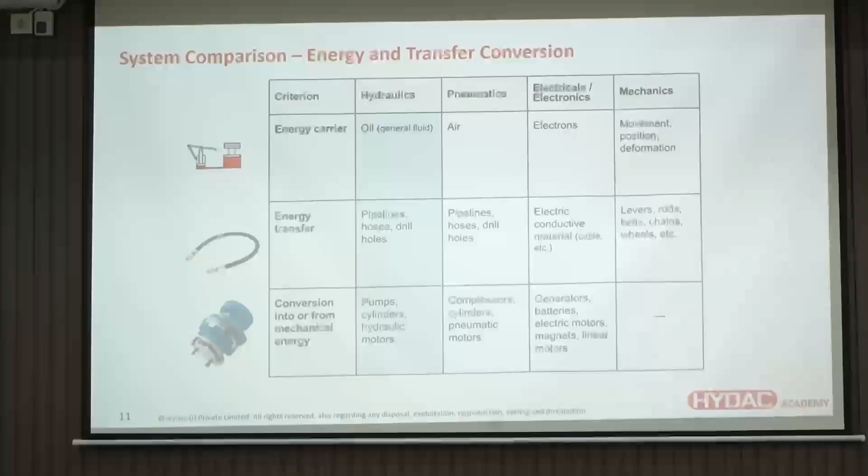So we had just made a comparison of different technologies. Typically, wherever very high forces are required, the best suited one is hydraulics. But alternatively, you can match that with electricals. For the size ratio, hydraulics to generate the same force, the component might be only this much size. But if I have to generate the same force using electrical, the component will be much bigger. When it comes to safety aspects, nothing is safer than pneumatics. So there are multiple options for you guys to select which technology we have to use. Looking at various aspects, you need to pinpoint one technology which can be used.

Now, I also told you that India is a developing country. There are several industries in India which have been classified also. Large scale companies are there, similarly medium scale enterprises, small scale enterprises, and such kind of things. Now, you go to any industry, you'll see one or the other automation being implemented either on the machine level or on the entire factory level. It depends on the size of the industry.

So now, if I generally see which are the predominant industries which are working, I can classify them as steel sector, cement, automotive, railways, mining, machine tools, press, defense, oil and gas, power, and mining as well. So you take any industry for that matter.

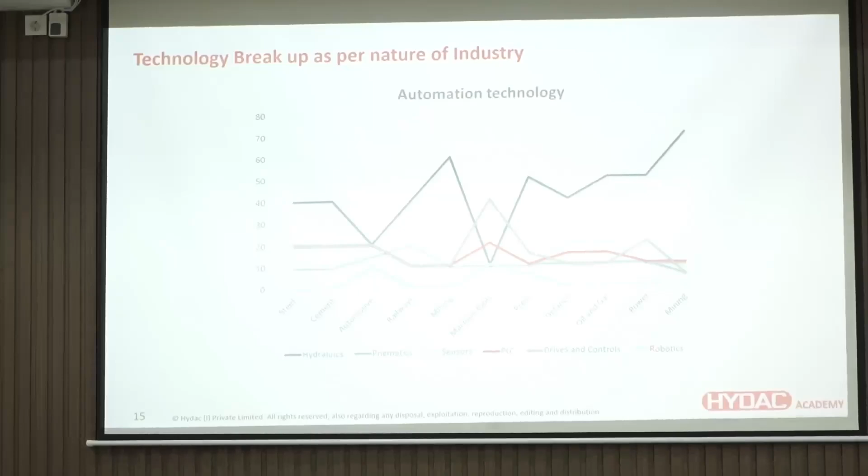So in this particular graph, you can see hydraulics is predominantly used in steel and cement. Automotive is a bit lesser because we don't need that much amount of power. Mining, predominantly it is hydraulics. Machine tools, when I say machine tools, it is CNC machines - basically your lathe or milling machine or vertical milling machine, such kind of things. It requires hydraulics only for certain operations. The rest is all electrical.

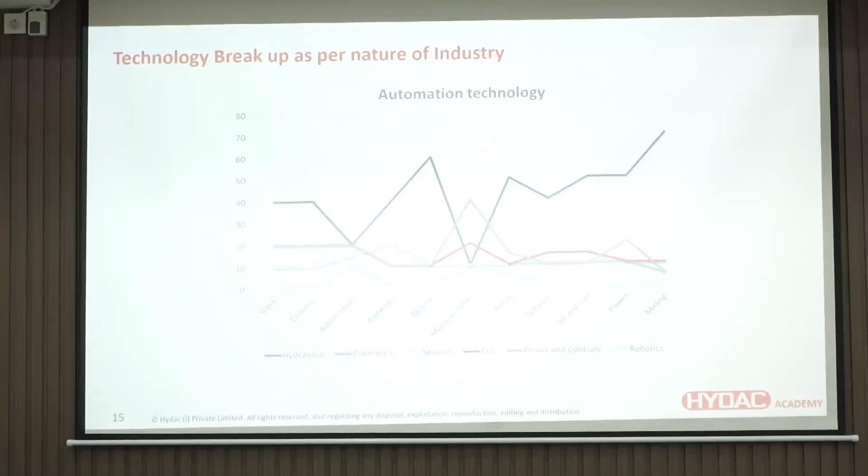So every industry has got its own share of hydraulics, pneumatics, PLC, and sensors. These technologies form the basics for your automation. So when you, many of the students here, end up into a job, you may not happen to use all the technologies, but you may end up using any one of the technology.

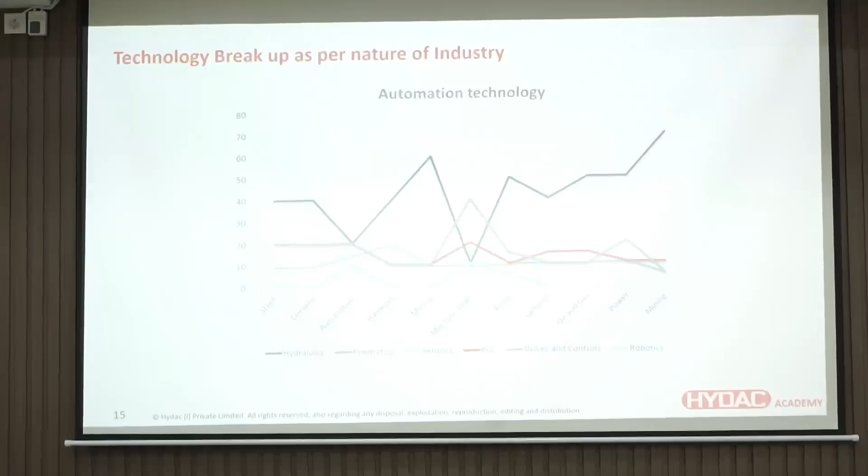Some people may get into something called PLC programmer, where you'll be constantly writing logics for the machine. Few of you may get into design aspects of hydraulics and pneumatics, so there's a lot of calculation of force, pressure, such kind of things, and selecting the components also. But irrespective of any industry, you have got potential for all the technologies.

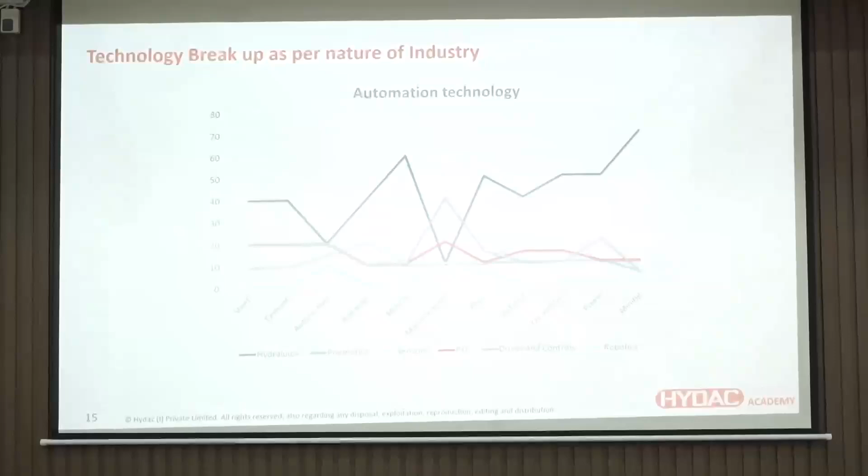Now, this is a statistics predominantly done for India only. We are a nation where we are very aspiring. We want to implement the technology, we want to know the technology, but if I generally visit a lot of industries, many of our industries are still stuck in Industry 3.0. And when it comes to small scale and medium scale, we are still with 2.0 also. But now, as a technology and learning aspect, we have already reached 5.0.

So what is the next generation going to be? I am sure my old friend, in the first session of the FDP, Mr. Milind Tavre, he addressed Industry 4.0 and 5.0. So what does today's generation PLC work like?

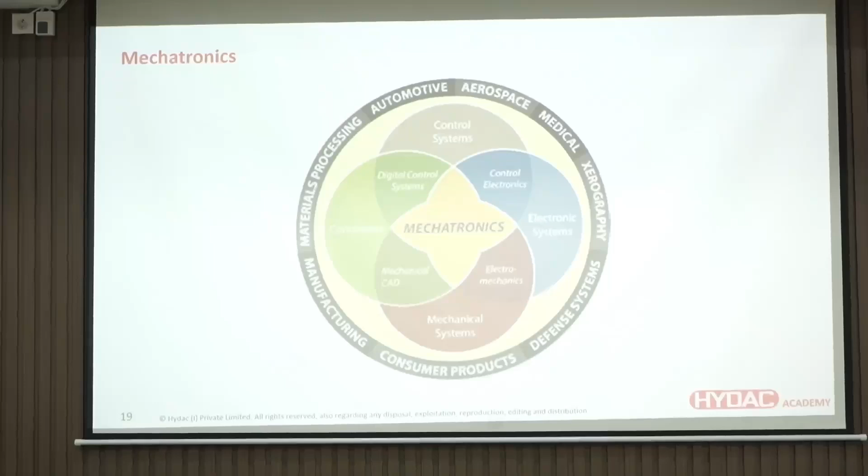Now, since my introduction was given to all of you, I have ended up working in the industry for almost 24 years now. Since 24 years I have been working in industry, but Ramesh sir read a big list of companies. So I had got a very good habit, or a bad habit, of changing jobs. In the initial days of my career, whoever used to offer me good salary, I used to jump. So I started changing companies. I started with a CNC company, went into automation, then went into security control access products, then went into wafer fabrication - not the ice cream cone wafer, semiconductor wafer fabrication - then went into hydraulics pneumatics, continued with hydraulics. Now I have switched over to 3D printing.

Can you tell what is my background? Whether I'm computer science, mechanical, electrical.

So what I meant to say is, though the technologies are different and your areas are different, when you end up in an industry, it really doesn't matter which stream you belong to, unless and until you can fulfill the given task. So my background is basically electrical electronics. But to be very frank, I am very comfortable with hydraulics and pneumatics. Problem was I couldn't see electrons. Hydraulics, at least I can see the oil coming out, air pressure I can feel. Concepts are all the same. It is only how you apply your mind and understand that particular process.

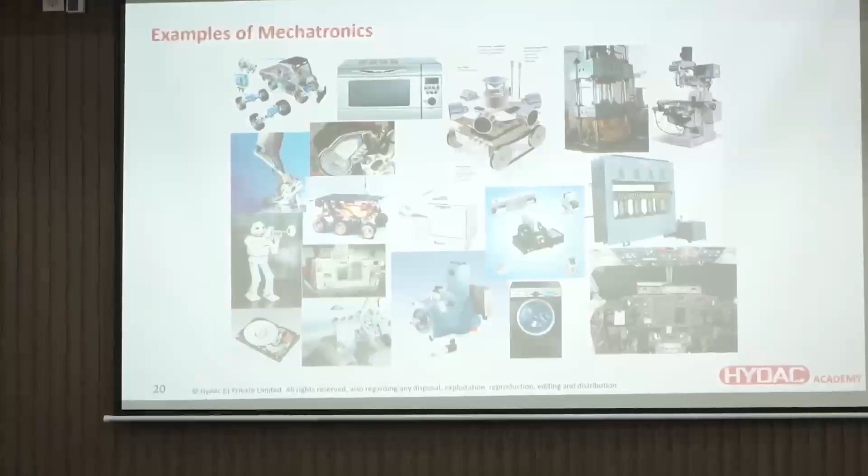So there can be a lot of different kinds of mechatronic systems also, and robotics also you can name as one of a mechatronic system. It's not that it is a very unique technology or anything. It is nothing but a combination of your electrical, mechanical and IT. Output product is called as robotics.

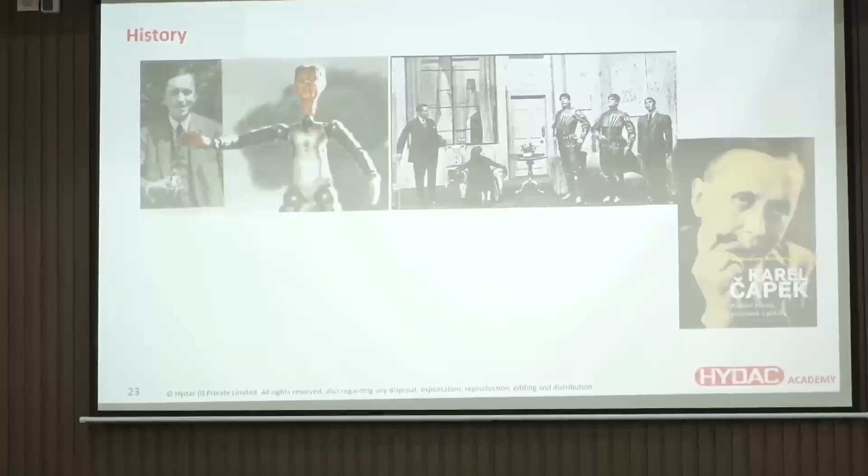So these are all we have covered during the starting. Here also I don't want to bore you with the history and all. Basically robotics was not at all meant for a technical term. It was basically a Czech Republic drama which happened in 1921 where they first introduced the term called robotics, which referred to slaves. Over a period of time when we started doing advancements in mechatronic systems and all, we adapted this word called robotics.

So I think these are all known to you. I don't want to bore you with such kind of things. You can Google and get it, and even I can share this presentation and you can have it later.

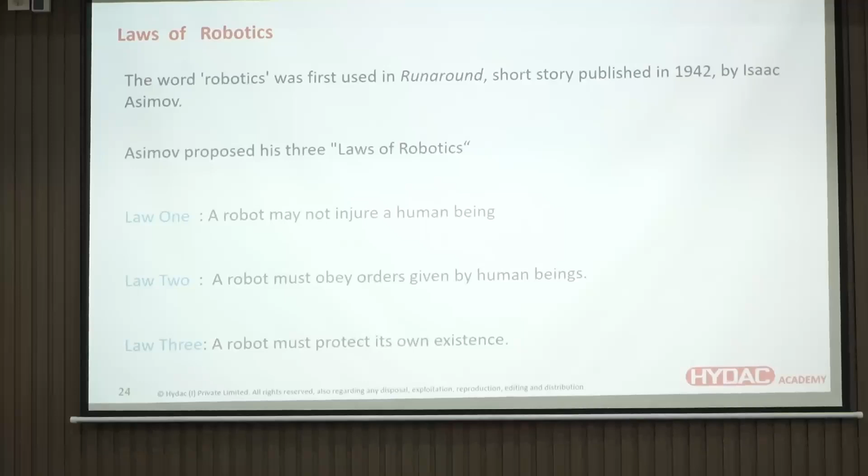So the main typical robots which are used can be classified into two aspects. One is industrial robot, or you can refer it as stationary robots. Whereas the other one we can call mobile robots, which is not in a given stationed position. It will be continuously on the road.

Mobile robots all started with students participating in competitions like rover competitions or racing car competitions. Nowadays, people even design rovers for sending to space. Have you participated in the ISRO research basket? Every 2 or 3 years, ISRO gives a lot of problem statements, called the ISRO research basket. HAL and other government agencies do it too. It's open only for institutions. You can go through different problem statements, and if you think you can provide a solution, write a proposal and send it. They will fund it for 3 to 4 years, spending crores together, and you can pursue that.

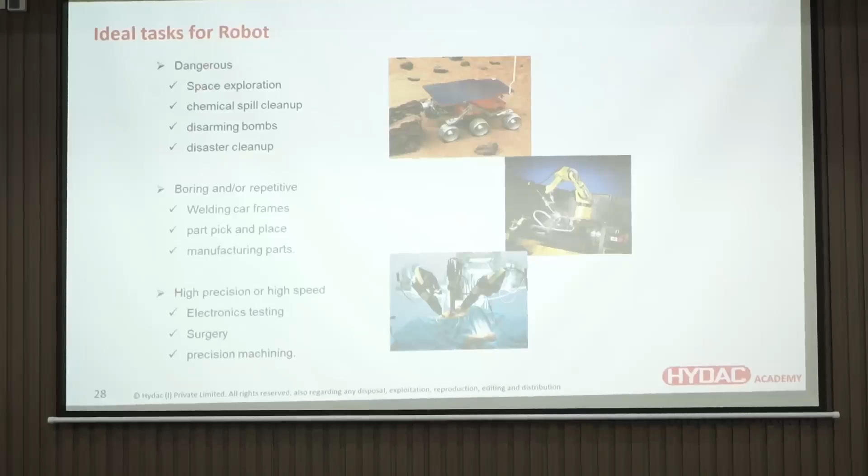Ideal tasks for robots - robots don't need to be applied everywhere. Typically, only for repetitive jobs where you'd otherwise kill human creativity. For example, if I have to pick and place something and tighten it, but I've quarreled with my wife at home, that anger will show in my work - I won't tighten it properly. Machines are safer that way; they do repetitive tasks well. Second, wherever humans cannot reach - very small areas or hazardous areas with poisonous chemicals - we can use robots.

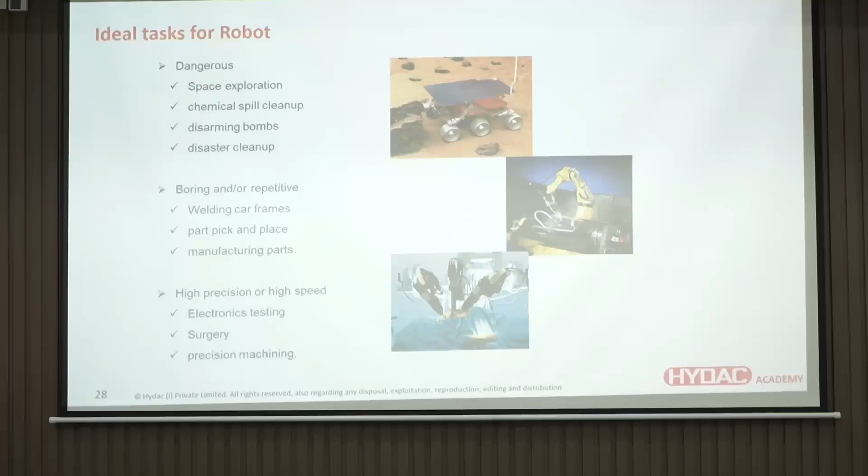This is a trending topic now - robotic surgery, done with robotic precision. There too, predominantly this technology is being used.

As I said, robotics is not of one discipline. Many disciplines get into robotics - mechanical, electrical, electronic, instrumentation, systems engineering, and even computer science. Today's generation, even AI, ML, and data analytics all have a role to play in the advancements of robotics.

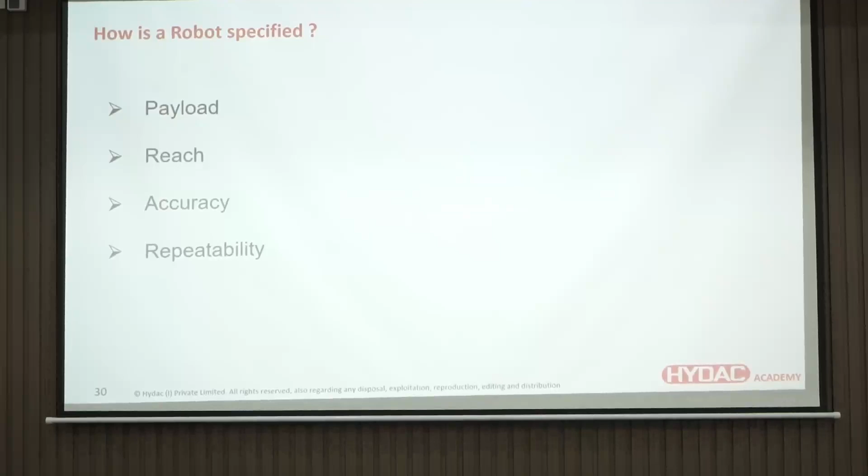How do you specify a robot is very important, since there are many different models of robots. When you want a robot, how do you ask for it? Generally, the first thing is payload - does anybody know what payload is? It's how much weight it can lift. For example, if this hand is a robot, this becomes axis 1, 2, 3, and if I have to lift this, the weight I should be able to lift is called the payload. Second is reach - how far your robot has to reach. Then what is the accuracy?

Here the cost really changes. You can do it with an induction motor with very coarse accuracy, or if you want very high accuracy, as low as 1 micron, you can get that too, but then you need to use servo motors. Then there's repeatability - if I do the same task every time, what will be the repeatability, or what will be the deviation in the end position? These points are very important when specifying a robot.

I've explained the same thing. This presentation will be available to you, and you can read through it.

This was a slide I prepared 7-8 years back. Is this all still true today?

Have you heard of collaborative robots? What is the difference between a normal robot and a collaborative robot? Correct - a collaborative robot can work in coexistence with other robots or even human beings, and that will not lead to accidents. That is called a collaborative robot.

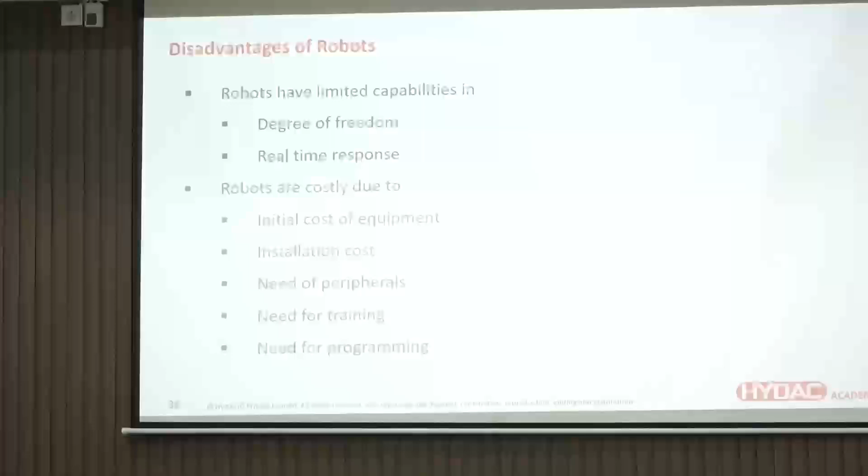So disadvantages of robots, some more here. Initial costs are very high compared to a conventional automation system. Whenever you need to expand, you need a lot of other peripherals. So like tomorrow you want to incorporate a vision sensor, it has to be had separately and then integrated.

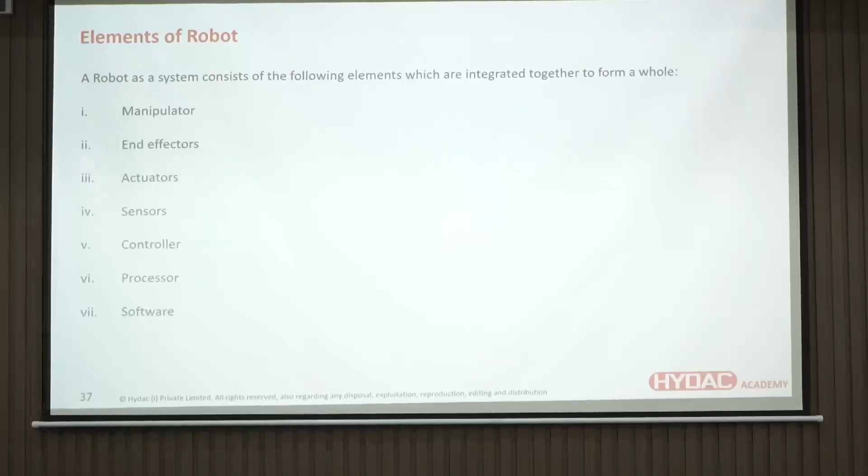So, different elements of a robot. A robot is not only one thing. You've got an end effector, you've got an axis, you've got a manipulator, and many such kinds of things. Mainly the manipulator is your structure, which creates the joints for achieving the degree of freedom. The end effector is basically the gripping mechanism or the tooling mechanism or insertion mechanism, whatever you want, you can have. The robot can be a simple thing.

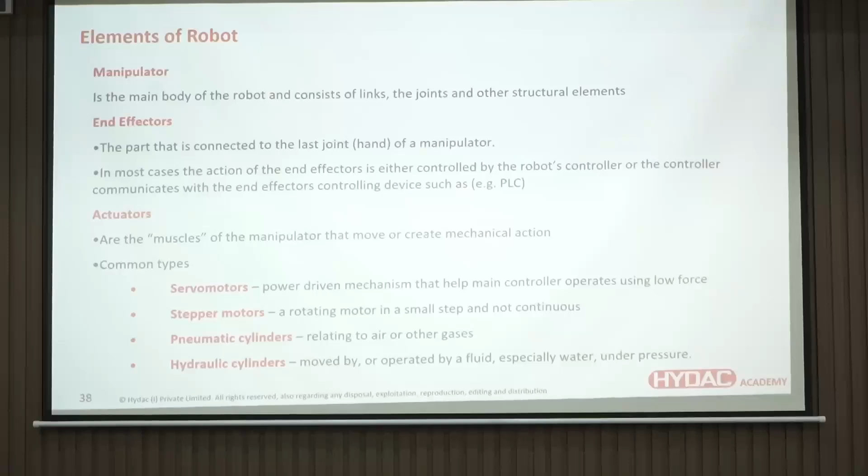At the end of the robot, you can put a welding torch. You can put a two-jaw gripper to lift any component. Or if you want to pick round objects, a three-jaw gripper. So end effectors - the possibilities are endless.

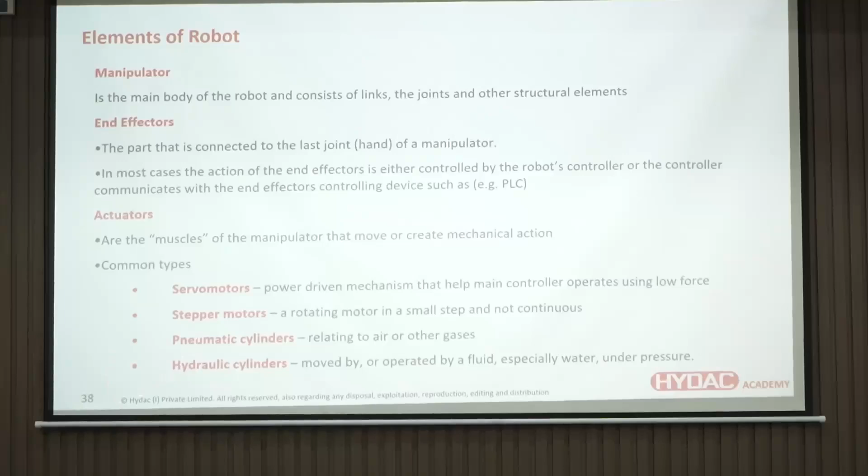Actuators - so depending on your accuracy, you can have either hydraulic cylinders, pneumatic cylinders, stepper motors, and for very high accuracies, servo motors.

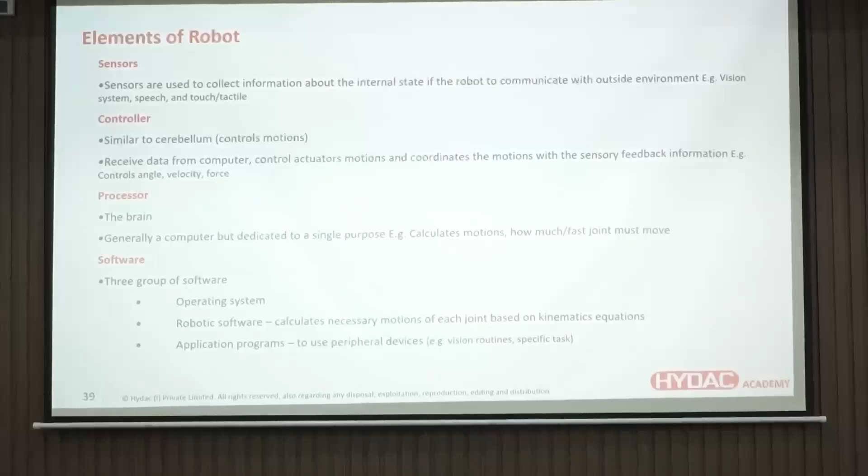Sensors play a very critical role in any automation. We generally say that for any automation system to see what is happening, that is only possible through sensors. So without sensors, any automation can be considered as an open loop system. There is no feedback, it is simply doing certain things. And some things are closed loop, where you continuously see what is the error and correct it. So to do that, you need a sensor.

Processors are the brains of the robot. This is exactly where the strength of your robotics lies. Now say I can simply put 3 axes. For example, I am in this position, my robot is here. I need to pick this material. So one thing what I can do is go like this, come down, pick it up.

This is a simple system, still it's called a robot. But your controller can be enhanced in such a way that, whereas before the time taken was going here, going here, going here, now I can simply go here. Correct? Now when I am going here, I cannot go straight away like this, I'd hit the mic. So I can program it such that I can go in a circular kind of pathway, or a straight pathway, or I can say move via this particular point. So it will go here and then go here.

So there are a lot of coordination functions - multiple axes working together in sync. It's not that only one axis has to move at a time. Every axis, if there are 4 axes, 5 axes, 6 axes, everything can work in coordination with each other. That is the beauty of robotics. This is called kinematics, where you develop logics where you can define the path to go straight point to point, or via a point, or in a circular interpolation, and such kinds of things. That's the strength of the processor.

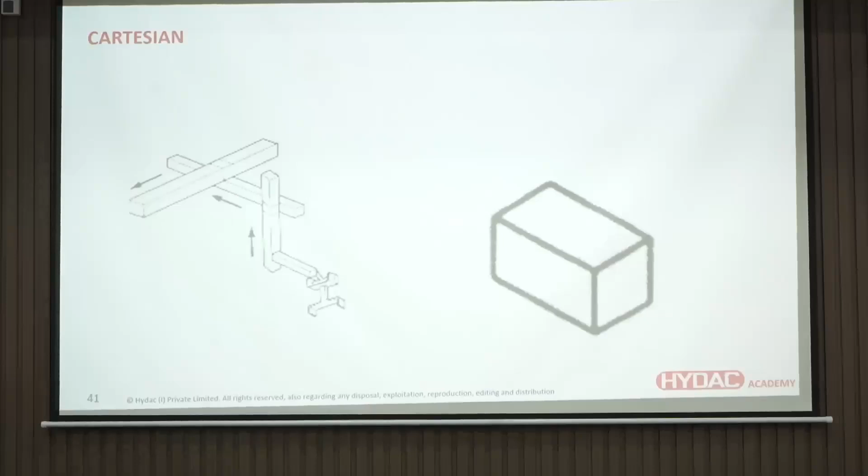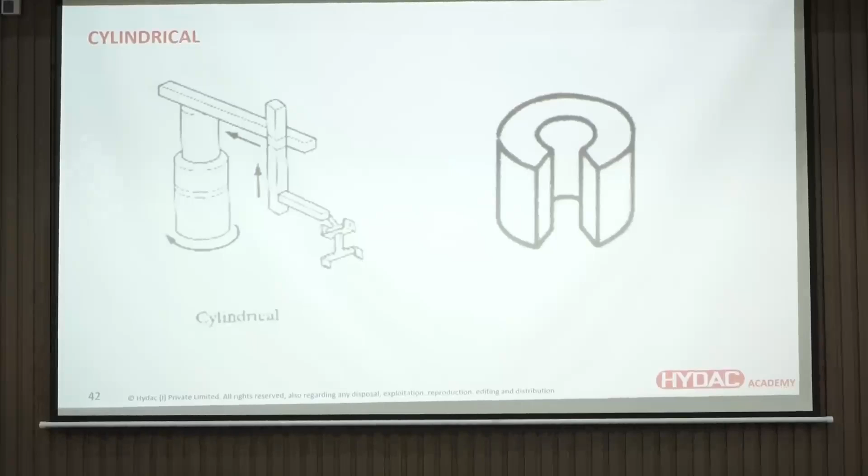Then we have got something called a cylindrical robot, where the working area will be within that particular circular shape. Then you have got spherical, so the working area changes.

Then comes the most advanced and most widely used robots, articulated robots, which will have a much larger reach, flexibility, agility, precision and easy to use.

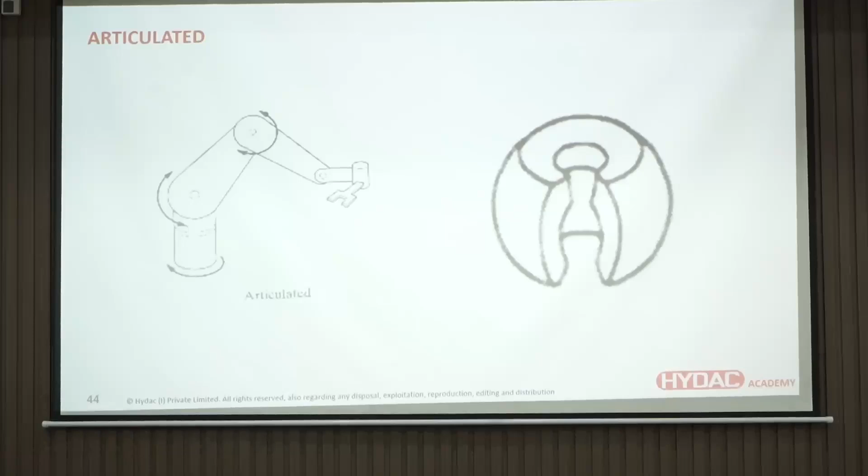SCARA robots are just like your hand. We call it left hand operation or right hand operation. In left hand operation, I can reach here, reach here, reach up to a certain length, but behind this I cannot reach. So if I have to reach this position, then I have to go for a right hand SCARA. It is just like your hand.

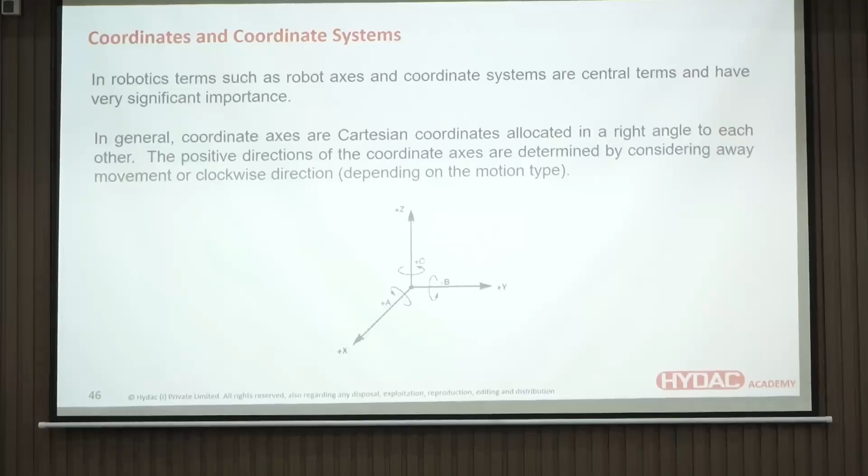At the same time, coordinate systems - robots follow different coordinate systems. If I say the robot has to move from my existing position 2 steps to the left, I'll go 2 steps to the left. Now I'll say 3 steps to the left. Whether I'm referring to from this position or from my home position - that defines a different kind of coordinate system.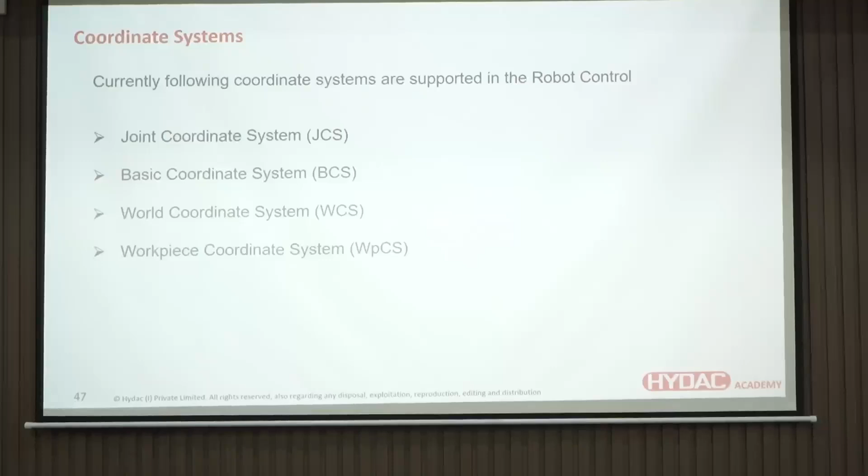So in this way we have got a joint coordinate system, a basic coordinate system, world coordinate system or workpiece coordinate system. Maybe you don't have to know everything. World coordinate system means from my home position everything will count.

Workpiece coordinate system means this is my final object on which I am going to work. So this point I will consider as 0,0,0 and from here I will define all the movements. So a robot will basically work with anything - user wise, if you have to be flexible, it's easier.

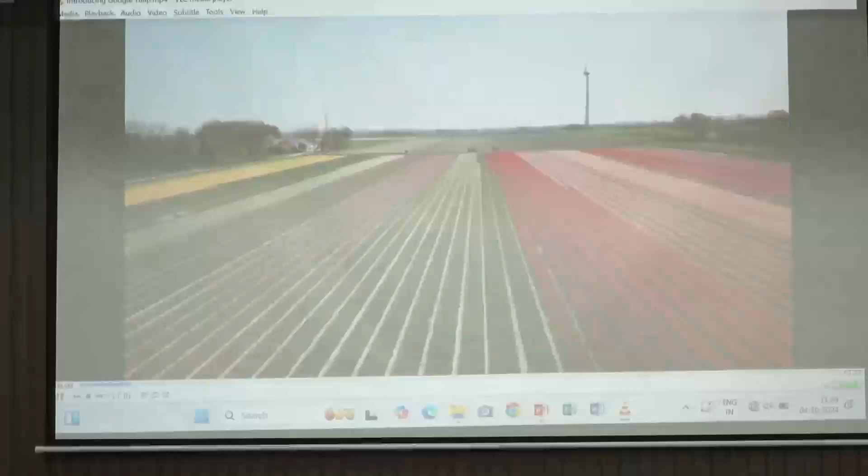So this is a product which is... there is some issue with the audio, which probably at the end of the session we'll see this video, or else you can just...

Search for Google Tulip. Tulip is basically a flower plant. They have collected data, and over a period of time they have developed algorithms and models of communication where they can speak to the plant, what it needs, when it needs, even general conversations also you can have with the plant. So we can end up to that.

So now coming back to our session, the last topic which I want to address is additive manufacturing. So anybody knows what additive manufacturing is? Correct - it is creating a 3D component by depositing material layer by layer.

Now, this is not a new technology. It is almost a 20-year-old technology which was already there. But over the last 5 to 10 years, the importance of this particular technology has tremendously grown.

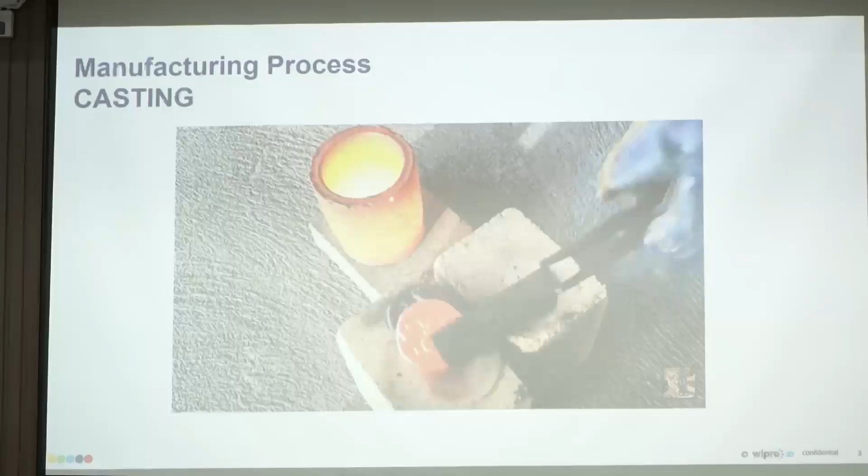So you can just click on that, it will play a video. Casting is basically - you've got a mold and you melt your metal and put it into the mold so that it takes that particular shape. So this is casting. Most of the components which are bulk manufactured still use the casting process.

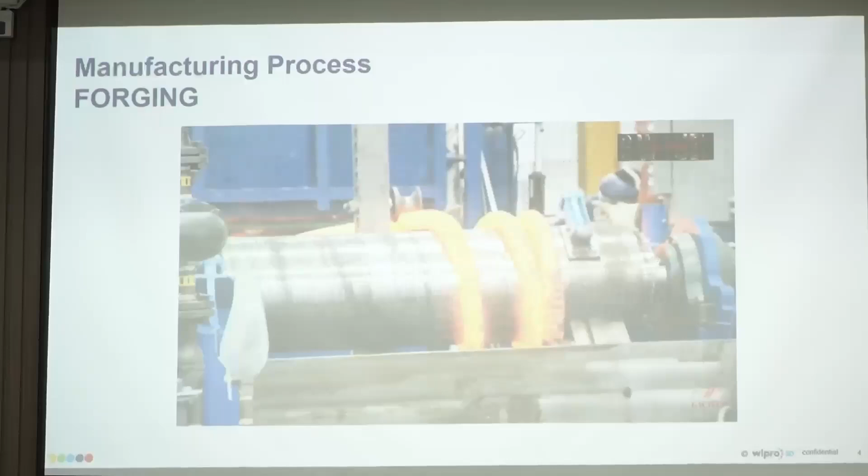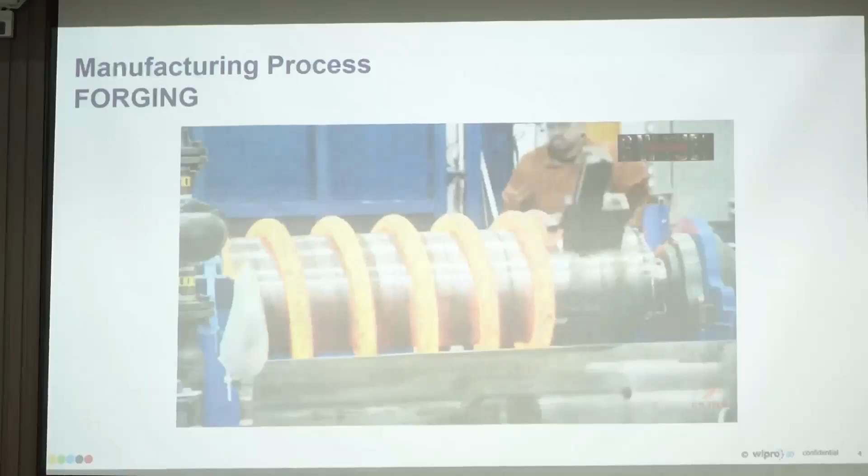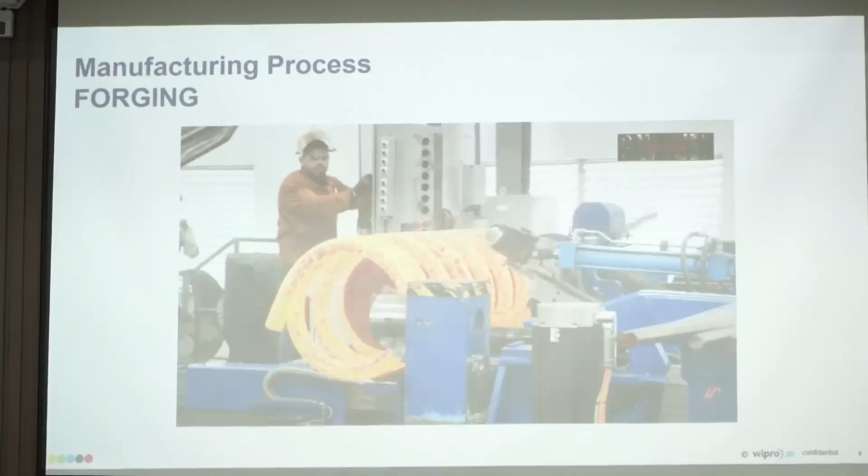So otherwise next is the forging process. Forging is compressing it, whether with heat or cold forge or any such kind of thing. So you are heating it and bending it into a shape. Second conventional method is forging. So this is the conventional forging process.

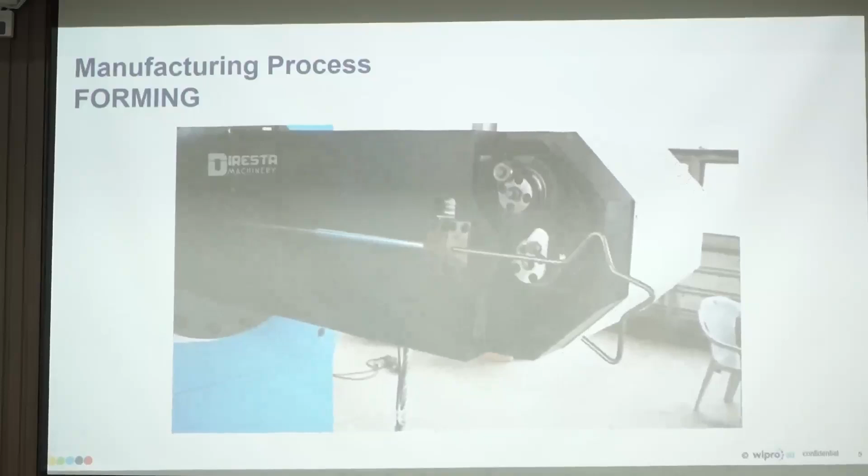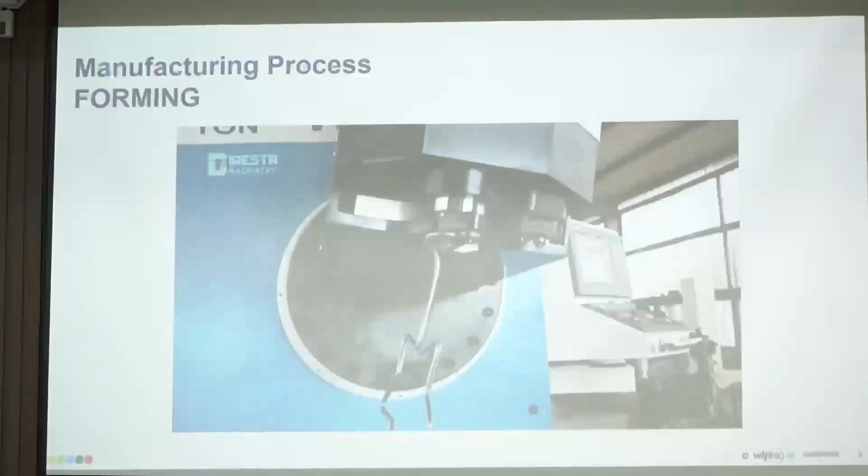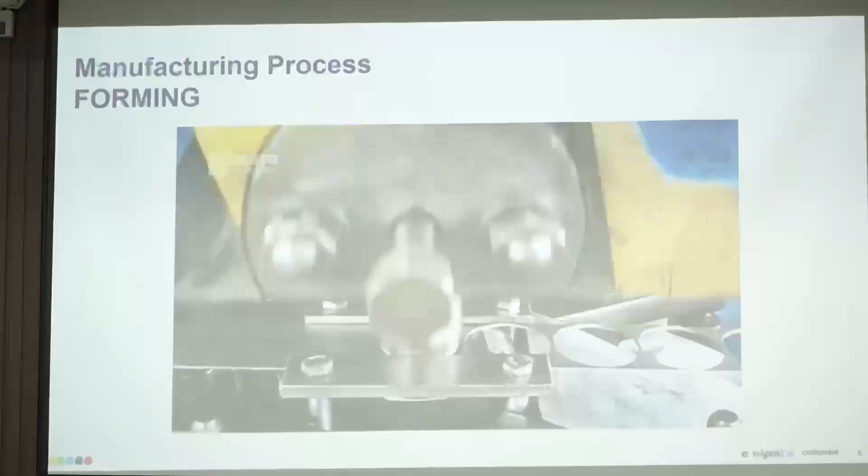Next is forming - see, bending the pipe into different shapes. Most of your automotives, your silencers and such kinds of things, everything uses the forming process. So the pipe is bent and cut here to a particular shape, punching holes into a sheet metal. So this is one more method of conventionally manufacturing things.

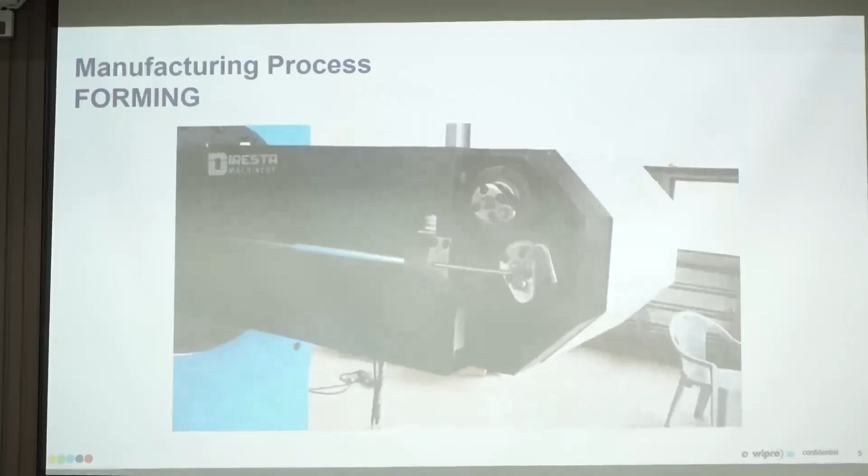Next is something called subtractive, which most of you are aware of - CNC. You take a solid part and then take out or subtract the unwanted areas from that by using a proper tool.

So these are all typically different general ways in which we manufacture certain mechanical components. Now the new method is additive manufacturing.

So you understand the terminology. This is subtractive manufacturing, meaning you start from an existing bigger piece and take out the unwanted part, keeping only the shape you need. Whereas in additive, there is no wastage there, but you melt and deposit material layer by layer in order to form the complete component.

Now, when it goes into mass production, that means I have to manufacture 10,000 components, then the best is such kind of process itself, because once the process is set, it is done.

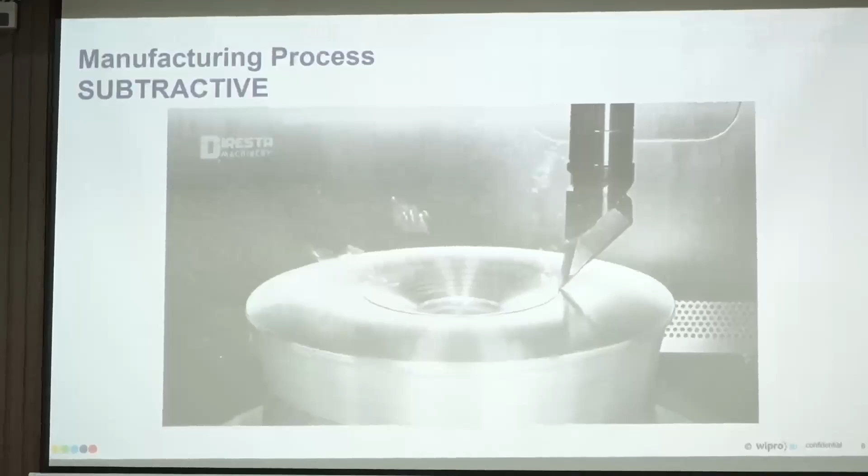Now I want to design this product for the very first time. Okay, first prototype I want to do, first product I want to do. Now can I make a mold first, then pour it, and then I will see that this angle should have been a bit more? Then my mold is gone. I have to make a new mold again and produce the component, which itself is a very expensive and time consuming process.

Suppose if I do all the design and I'll be able to print one component, printing this would take roughly around 1.5 hours. So if you can print it and then study everything, you can go into mass production by your conventional process.

So basically when 3D printing or additive manufacturing was introduced, it was basically focused on only one thing: rapid prototyping. So you have done a design, you want to realize that design, and for the first time you want to see how the actual component looks like, or how it functions, or how it goes into a bigger assembly. The easiest way was 3D printing or additive manufacturing.

But over a period of time, certain things have become more flexible with additive manufacturing, and we have come to a phase where we find additive manufacturing cheaper than conventional manufacturing for certain parts. So gradually, over a period of time, additive manufacturing is taking over the conventional process. Not everything, but certain aspects.

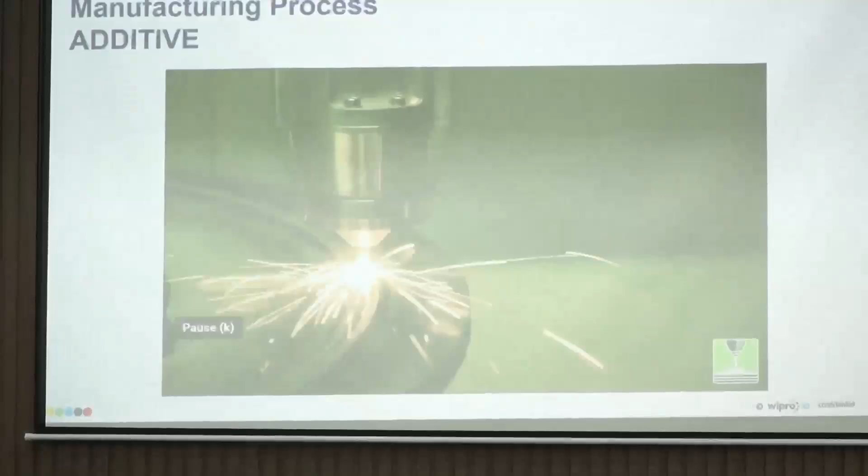So this is how additive works. It is melting a wire or a powder of metal and depositing it layer on layer. So the process is a bit slow, but when it comes to the first prototype, it is always faster.

There were a lot of different techniques shown. I will show you that in detail also.

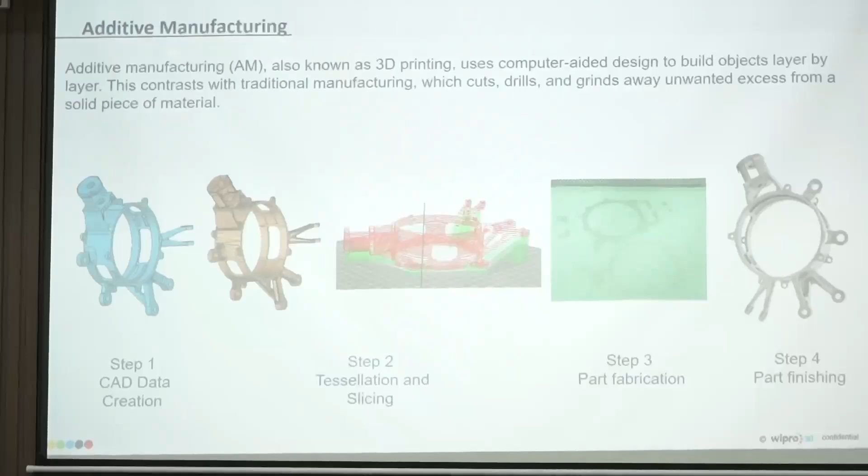So typically, your additive manufacturing workflow will initially be your CAD creation, a 3D drawing, which you may end up doing using SolidWorks, Pro-E, CATIA, Fusion 360, anything. So you do your 3D model, then that will be imported into a 3D printing software.

Then we have to decide, a critical thing in 3D printing is, if I have to print this, whether I print it like this, or like this, or like this, any direction I am okay to do anything. But we need to understand that 3D printing is a layer by layer process. If I want to print it like this, I'll print this layer, this layer, this layer. Now when I have to print a layer, I don't have any support at the bottom. So if I melt material and put it in the air, it will come and fall down. So it is not possible to print like this.

So I have to optimally decide in which direction it has to be printed. In this direction I can print it, but again if I closely see, on the top it is flat and here it is hollow. So if I want to print this flat surface, it will fall down. So what the software can do is generate supports, an additional thing which will be printed from layer one, and that will help in printing the finer flat layer. These supports are designed in such a way that I can use my hand or a simple nose plier to pull it out and it will break off. This will be built with bigger thickness, stronger parameters, whereas the support will be of lesser strength and can be removed easily.

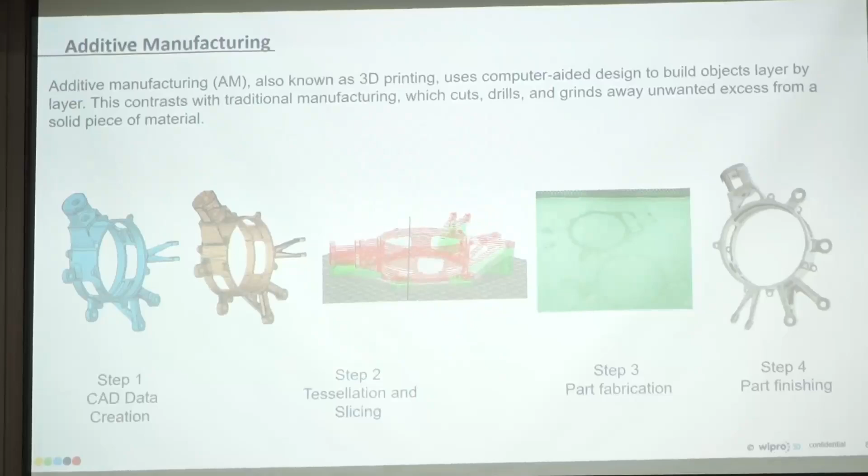So we'll have to decide on the orientation, and then this 3D model will get sliced into many different parts. This sliced thing will go into the machine. The machine will take only the first slice first and only deposit that. Once that is done, second slice, third slice, fourth slice, like this it can be thousands of slices, one over the other. It will start doing the function, and finally your finished product will be available.

Clear on how 3D printing works? Got a rough idea?

So, based on the standards for additive manufacturing, we call it ASTM. Under this, we have identified so many different processes of 3D printing. The first one is VAT photopolymerization, or we can call it stereolithography.

So this raw material is resin. Anybody knows what resin is? It is in a liquid form, a bit thicker, but still liquid. Various different kinds of resins are available. If you keep it for drying, some things will become hardened. Or some things, when you expose them to UV light only, then it will become hardened. Some at a laser of a certain wavelength only will harden. So we use such kind of resin.

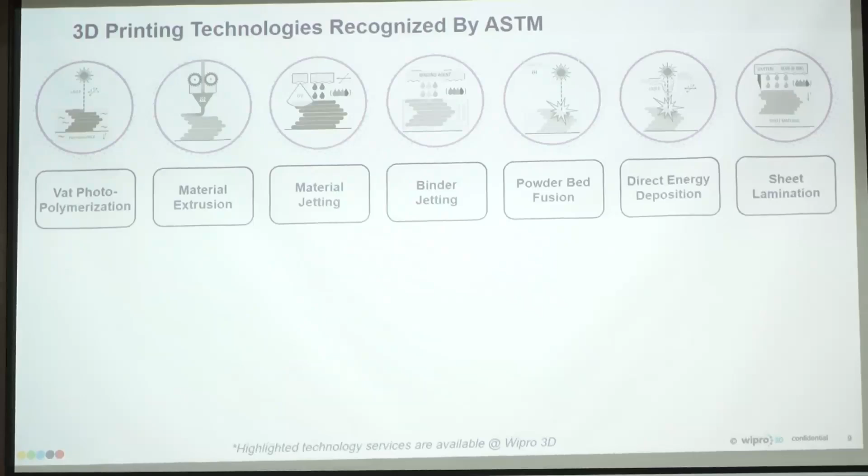For 3D printing, basically, I'll give you an example. We use a UV light, a screen same as your mobile screen, but which will emit UV light. On this, I'll put a transparent tank, and inside the tank I'll fill it with resin. Now once I do that, I'll have something called a build plate, which will be the same shape as the tank size. So this build plate, I'll put it exactly down like this.

Now on this particular display, I will flash the first slice. When I flash that particular thing on the screen, only that portion of the resin will get hardened. Next, I'll lift this build plate slightly above, so resin will fill again. Second slice, I'll project the image. Like this I can keep taking it up and flashing new images, by which we can bring out a 3D product by itself. So this process is called VAT photopolymerization.

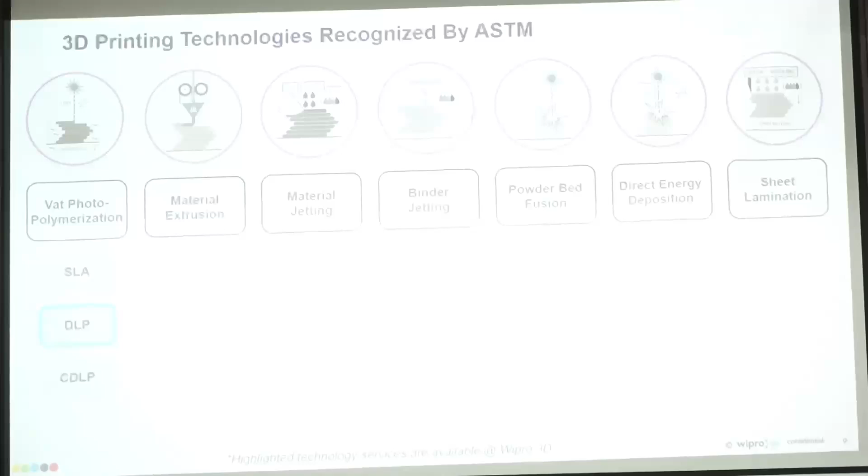Second one is easy, it is material extrusion. In this, we take wires, polymer wires or metal wires, predominantly polymer in this case. We heat it so it will melt, and there will be a small nozzle by which that material will be pushed out. So that material we start depositing layer one over the other to build a component, which we call FFF, meaning fused filament fabrication.

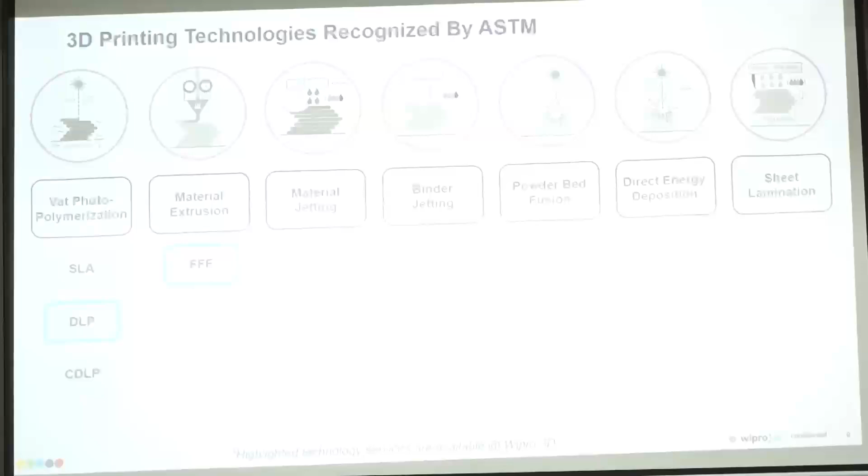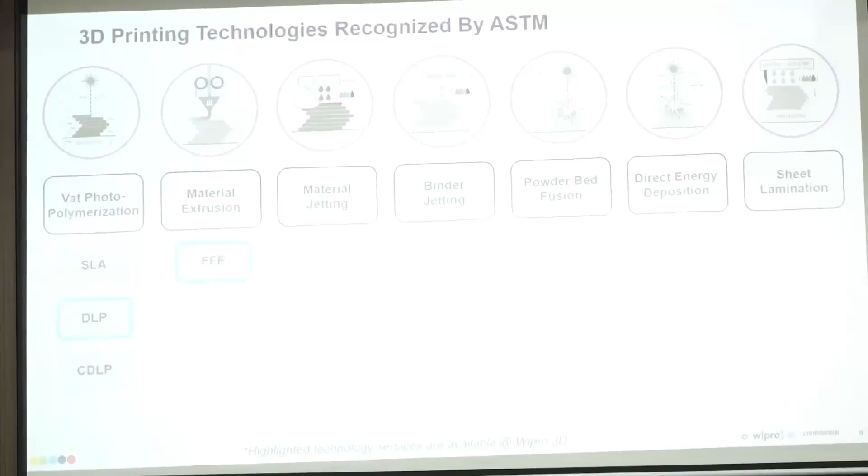The next one is material jetting. In this, instead of using wire or resin, we use powder, polymer powder, with each powder size around 30 to 50 microns. That powder, we spread over a layer with a thickness of say 100 micron or 50 micron, and then we pour some resin on it wherever we want it to get hardened. Once we pass some light, it will get hardened. Next we put one more layer of powder on that, again put resin wherever it needs to be hardened, again expose it to light. And like this we keep doing it to achieve a component.

The next one is very similar to material jetting. In binder jetting we don't use resins, but we use some chemical by which your powder will automatically get hardened. That is called binder jetting.

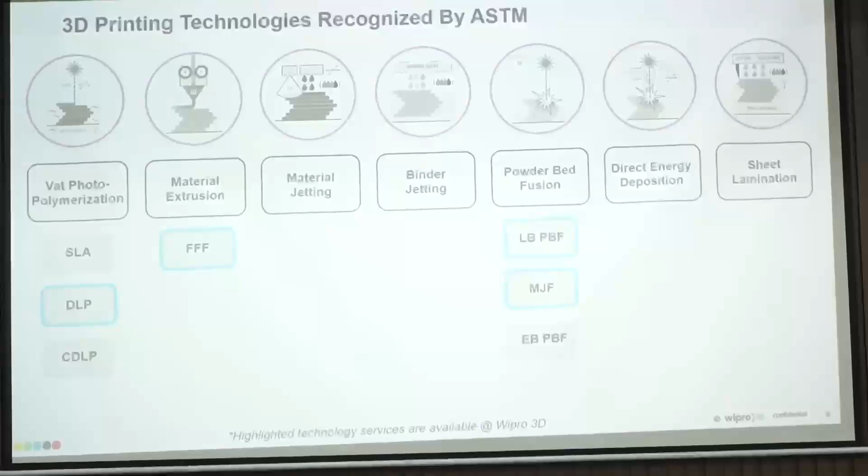Next is powder bed fusion, predominantly known as LPBF, laser powder bed fusion. So this is predominantly polymer, whereas this you can print 3D components from it.

Similarly, MJF is multi-jet fusion, very similar to binder jet, but it can do metal also. This is electron beam powder bed fusion. The only difference between these two is this is laser, this is electron beam. That's all.

The next one is direct energy deposition. This process is very similar to FFF. Here we take a metal wire and melt it and deposit it. That melting can happen through laser, electron beam, or it can be arc melted also.

And the last one is sheet lamination, meaning you put sheets one over the other and press them together. That is also possible, but these are standard processes defined and accepted globally.

But the widely used ones are VAT photopolymerization, FFF, LPBF, binder jetting, and DED.

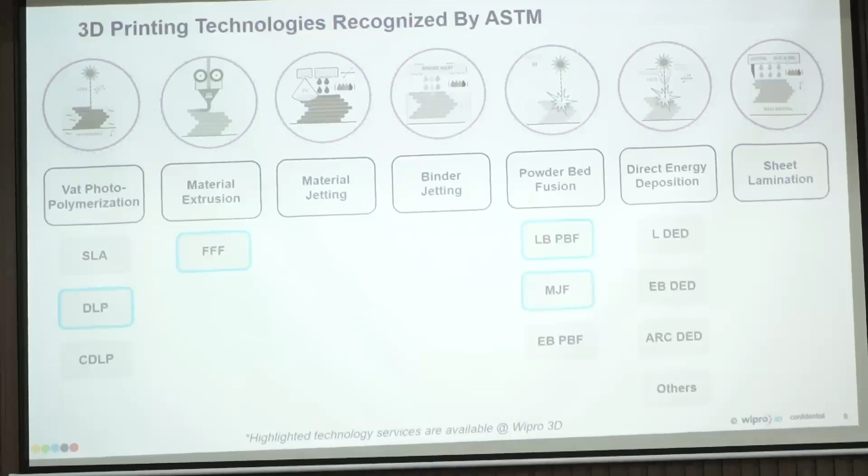Any doubt in this? So any doubt in this, or is it clear? There are different processes, but everything is done to produce a component itself, ultimately.

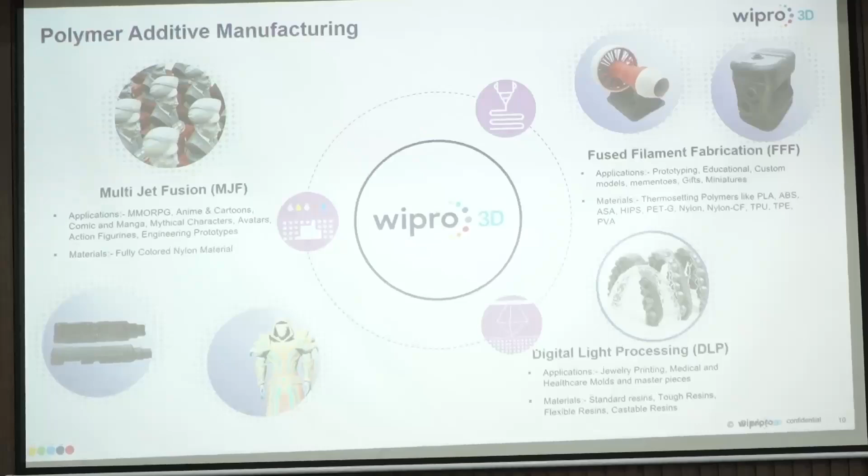So basically when it comes to additive manufacturing, the key things which are very important is, one is material selection. What kind of material I need, what should be the properties of that particular material, and even what kind of strength that particular material will provide. So like this you get a lot of manufacturers.

To be very frank, till the last 5 years, we didn't have any manufacturer of powder in India. Now we have got 4 or 5 manufacturers. But when we tested everybody, we found only one powder manufacturer is qualified, who can support with the best quality. So we have got good suppliers in India now.

It is not even mandatory that if my design is this, I need to retain the same design. There is a concept called topology optimization by which you can optimize the design. It's not that I need completely filled material here; it can be hollow in some places without compromising on the mechanical strength. So these things can be done only in AM.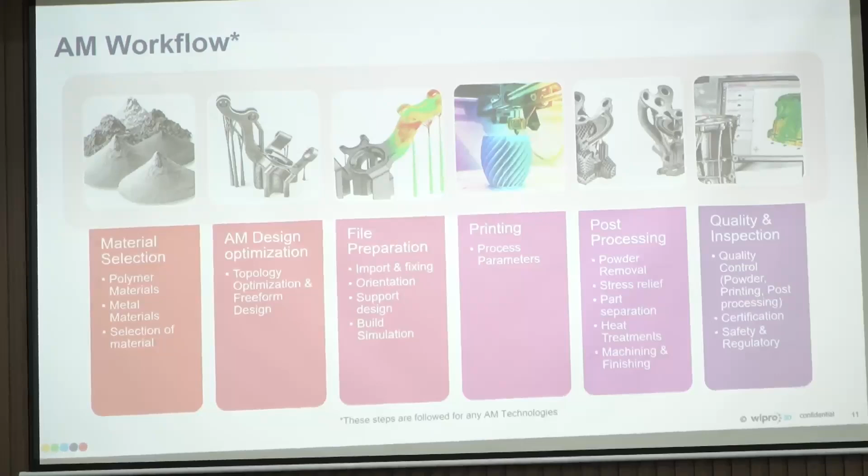I'll give you a couple of examples also. Now, you know these Chetak helicopters which our defense uses - it's a very old helicopter. The source country, I won't name it, some aerospace aircraft has been procured from some other country. Now that country has already got an upgraded version, they are no longer using that at all.

Now tomorrow if I need a spare for it, if it has failed, then I cannot produce it. I need to depend on the manufacturer who is from another country. And suppose we are already in a war with them and we need spares - will we get it? No. So there is another concept in additive manufacturing called reverse engineering, and one more thing called digital inventory.

Reverse engineering is - I have this product but I don't have the design file, I don't know what material it is, I don't know the tolerances, nothing. So typically we take up such projects. What we do is first take this model, use a 3D scanner, scan it and generate a model out of it. Then go to the application side and see where this product gets fixed. There we check for all the tolerances and other things. We design it, we cut the components, study the material composition, find out which material it is, and then reproduce it.

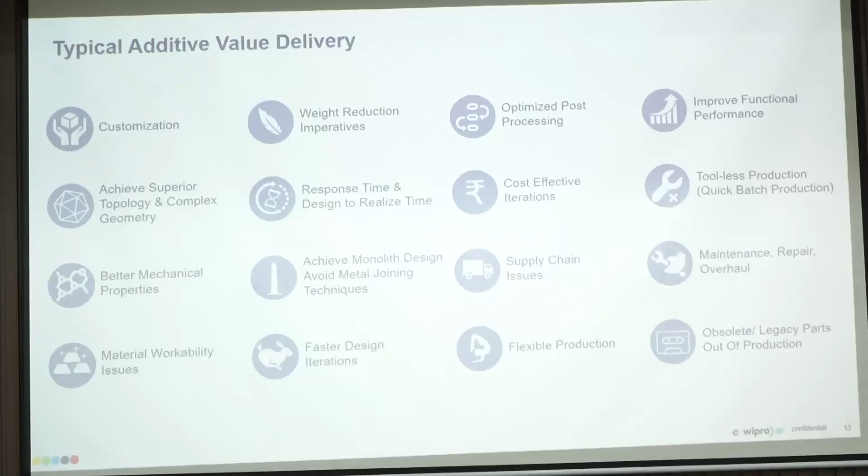Next, optimized post processing. So it is not that everything you need to 3D print. Some conventional parts you can first 3D print and then do the post processing like drilling, milling, cutting - everything can be done outside also.

Functional performance can be improved. One more case example which we did around 7 to 8 years back was a radio frequency antenna on a satellite. Previously it used to be done in conventional way, but due to the number of welding joints and multiple components screwed together, there used to be a lot of radio frequency leakages. When that was 3D printed as a monolithic structure, meaning there are no welding joints, no multiple parts - it is built as one component. So efficiency can be improved in such cases.

So you can achieve the optimal design without compromising on the mechanical strength, which we call topology optimization.

Next is response time, that is design to realization of your product. Unlike conventional methods, you don't have to wait for making the mold, casting it, or taking a huge block and doing CNC operation. No - you have the design file ready, you can straight away 3D print it and have your component within 1 or 2 days. If there are any changes to your final design, conventionally you'd need to change the entire mold, which becomes very expensive. But here you can simply change the design and reprint it again.

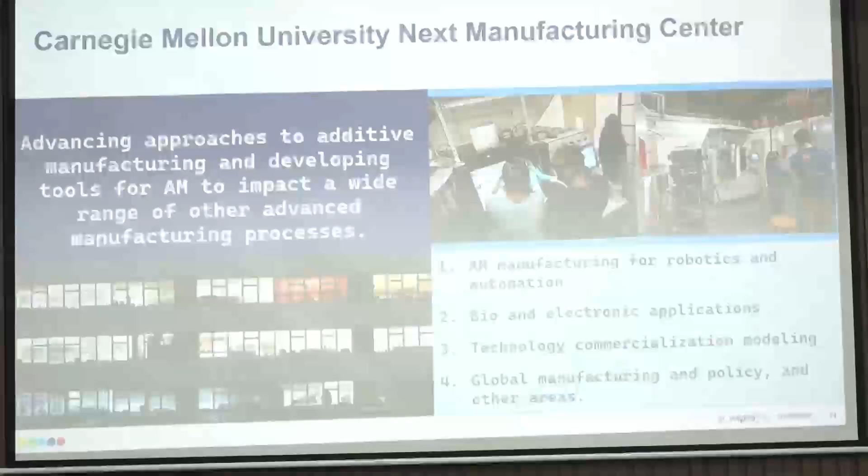Now that I've given you just the basics of additive manufacturing, some universities across the globe consider additive manufacturing one of the hottest topics in research, because the end applications are tremendous. You will not imagine how tremendous it is - so many universities are working towards it.

Now in India also, it's not that nobody is working on this. Indian institutes and universities are also working, but you can literally count them on fingers. For such a big nation with so many institutions and universities, there are very few institutions who are really doing a lot of research. So this is one.

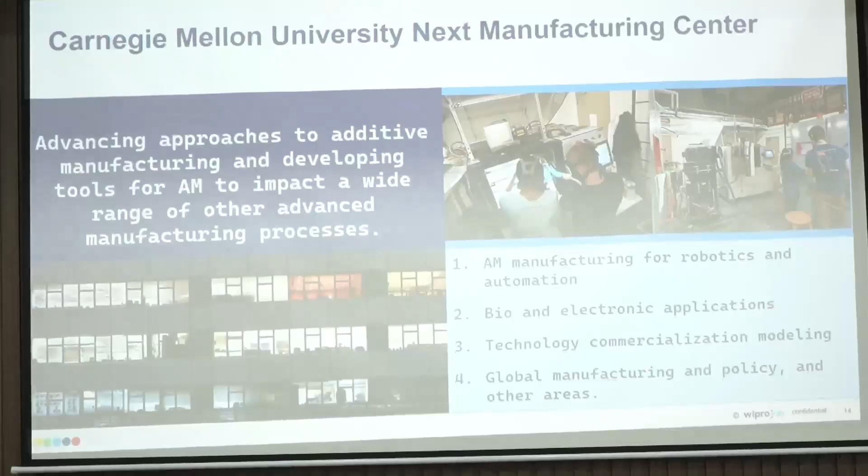Carnegie Mellon University - they are basically mainly working on additive manufacturing for robotics and automation. So when it comes to a robot, a different kind of body - whatever I was saying about collaborative robots, different materials and such kinds of things, they are doing a lot of research. They are also into bioprinting. So today's generation, you can even print live cells and mass produce from it. So probably in the very near future, you can print organs also.

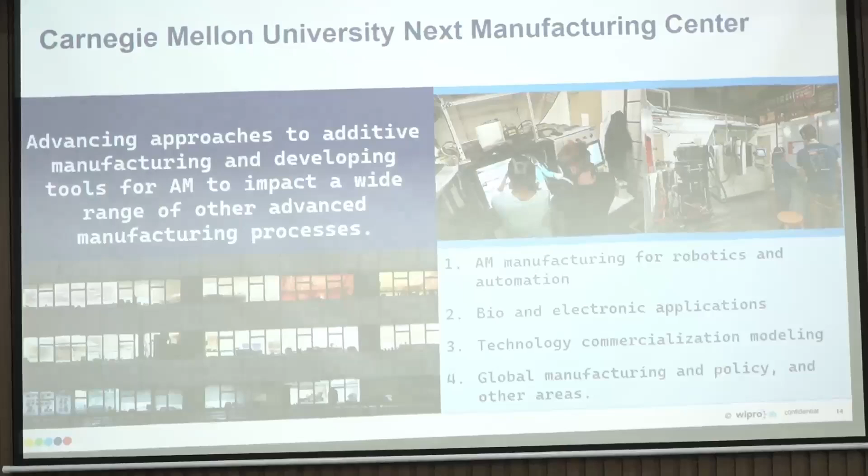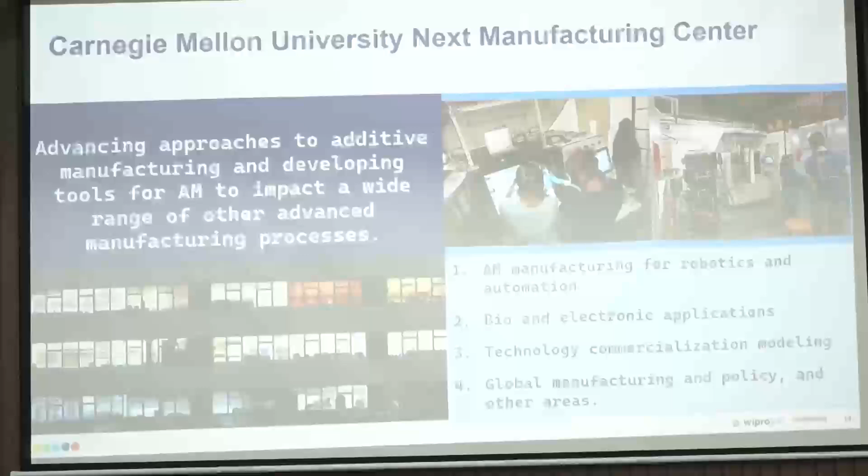Even in electronic applications, additive manufacturing isn't only for mechanical parts. Many people are working on electronic applications like PCBs. You want to build your own PCB, you don't have to get into Gerber design and all that. You can straight away print a PCB board with a 3D printer, just like a normal paper printer - tomorrow you'll have a 3D printer for printing PCBs. Over the years, semiconductors can print 1 micron, 2 micron layers and more.

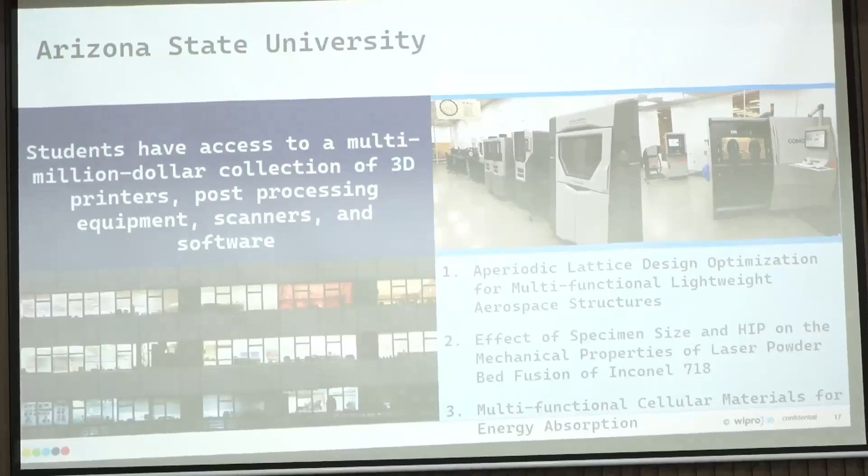The next topic is lattice design. Does anybody know what lattice design is? To give an example, earlier when we used to construct houses, the bricks used to be completely solid. Nowadays you see hollow bricks - less material consumption, lighter in weight, but giving the same strength. Same way in mechanical components, if I have to print a part, I don't have to completely fill it with metal. Internally it can be a separate honeycomb structure or grid design or any organic design which will not deteriorate the mechanical strength. Such internal structures are called lattice structures which give strength to the materials. A dedicated team will be working only on optimizing such things.

At the University of Texas, they are working on hybrid AM. Today, if I want to print copper, I can print a component completely with copper. If I want Inconel, I can print one component only with Inconel. I don't have a process where one part is printed with copper and one part with Inconel. So there is a huge opportunity in multi-material printing. Some research areas are there.

Large area AM means right now the biggest additive manufacturing machine available in the market is 1 meter by 1 meter by 1.5 meter. That's the biggest size. Now if I have to produce an entire rocket in one go, with the present technology there are limitations. So people are working on that, so that we can print a 50-foot container, probably 3D printed. It is possible, but we have to get a breakthrough over it. That's all.

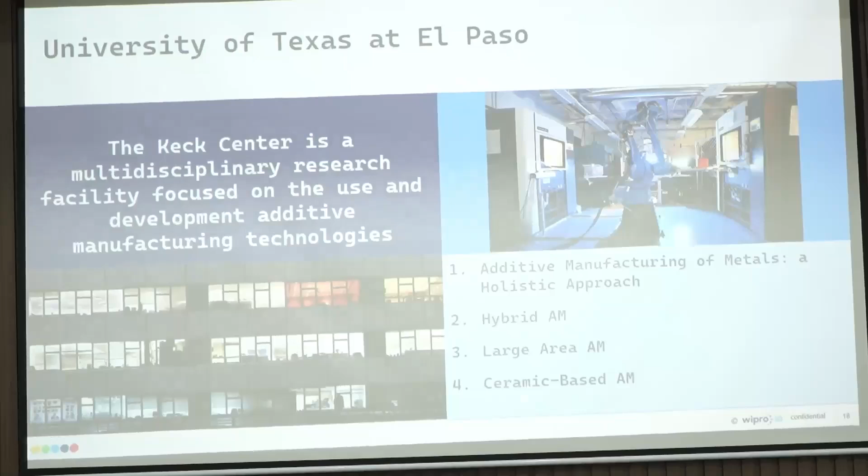Even ceramic-based printing is gaining a lot of popularity because ceramic is not reactive inside the human body. So implants in the future can be ceramic also.

This is just for your reference. Now all these particular universities have not achieved overnight success. They started a long time back and are still pursuing certain focus areas, and developments are happening. So this is one area which has got tremendous scope for research, career, everything.

The reason is, though the technology was old, people have realized the real use of it, the application of it. Personally, we have seen this being in the business for the last 3 to 4 years. Till that time, our only customers were defense and aerospace. Nobody else wanted to adopt additive manufacturing.

But in recent times, whether it is automotive companies, oil and gas companies, hydraulic companies, medical, even academics, everybody has started using this because it's an easier way to do things nowadays. So additive manufacturing has got its own space in the manufacturing world now. Whatever earlier was only 1% market share of additive manufacturing in the manufacturing business, today that has increased to 15 to 20%.

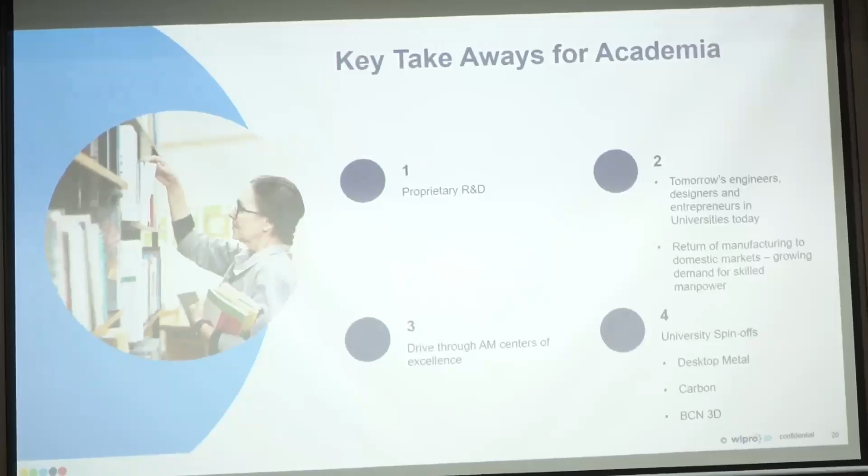So whatever you can see here, these are all company names, and they all started as a university startup. Students or faculties, anybody, started this in a university. Today it has become multi-billionaire companies in 3D printing.